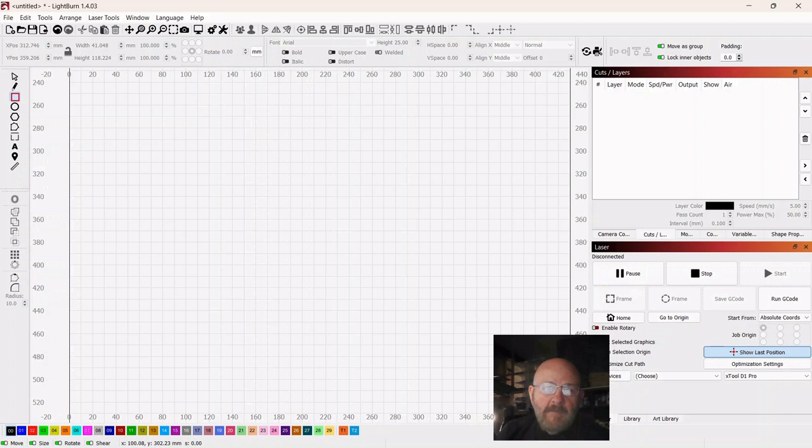So just draw out a square and click on your selector tool. We're going to try to leave this in millimeters the whole time.

Some folks asked me, or at least said it would be better if I stuck with one unit of measure throughout. They're probably right.

It'd probably help me get better with millimeters if I just stick with it. So let me know what you think in the comments.

So we're going to make this a width of, let's go with about 6 millimeters.

Now remember, you can scroll in and out with your mouse wheel, and you can push down and move the entire canvas around.

So now to make this look like a popsicle stick, let's grab a circle, hold down your shift key, and make that circle fit. Not like that, do better than that.

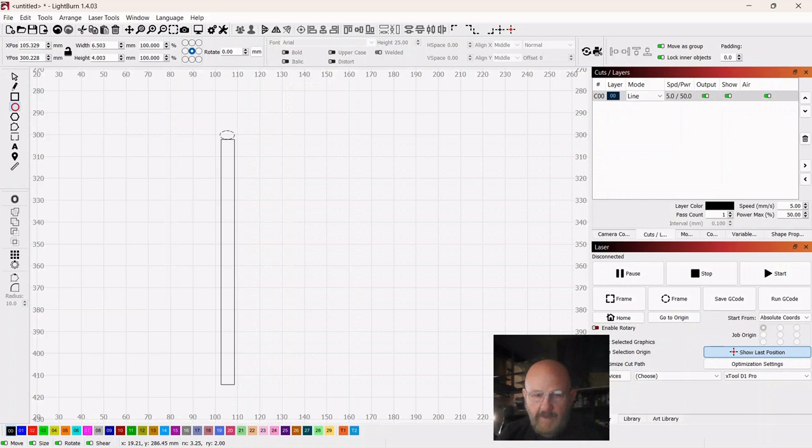Control Z will take you back. You've got to hold the shift key down to make it symmetrical, and then click your selector tool.

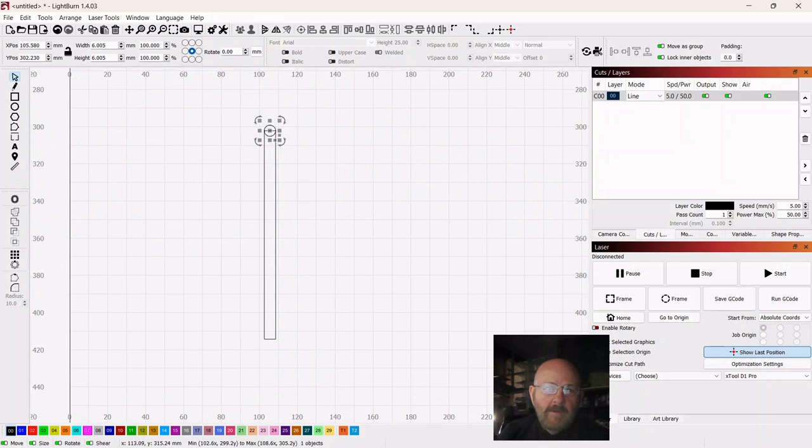Scroll in and then try to set it where it looks right, and then duplicate it, put one on the other end, and then you can weld those one at a time.

While that's selected, shift, select your stick, and then go over to the left and click weld.

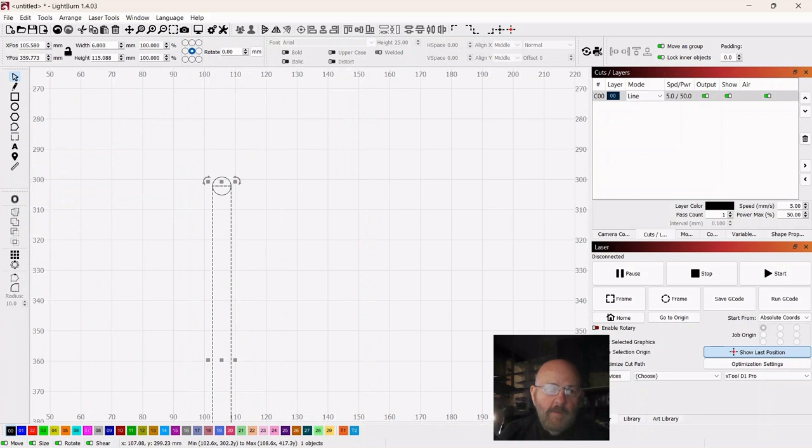That takes care of one end. While that's still selected, go back up, shift, select your other circle, and then click weld. Okay, now we have a popsicle stick.

We're going to need 5 of those. So select it, go over to the left and click Array. We're going to leave the spacing at 6 millimeters.

Then up here you can change your number of columns, and we want 5 of these. So there we have 5.

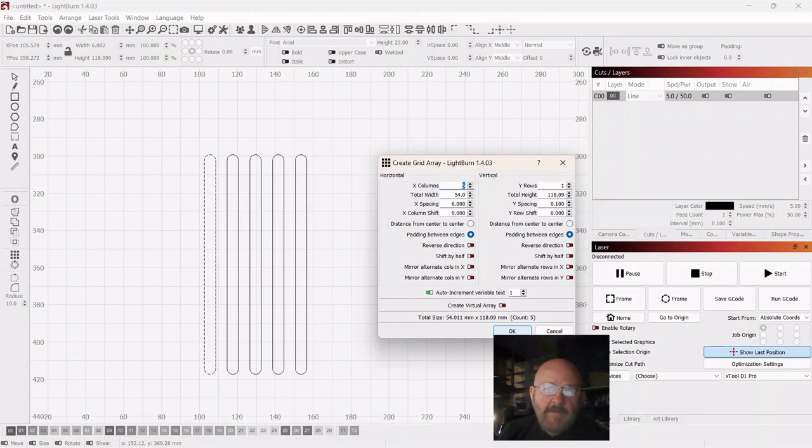Click OK. And then we're going to resize these to look more sled-like.

We'll make this center one a height of 101 millimeters.

We'll make both of these side ones 94. Oh, I didn't do something right. 94.

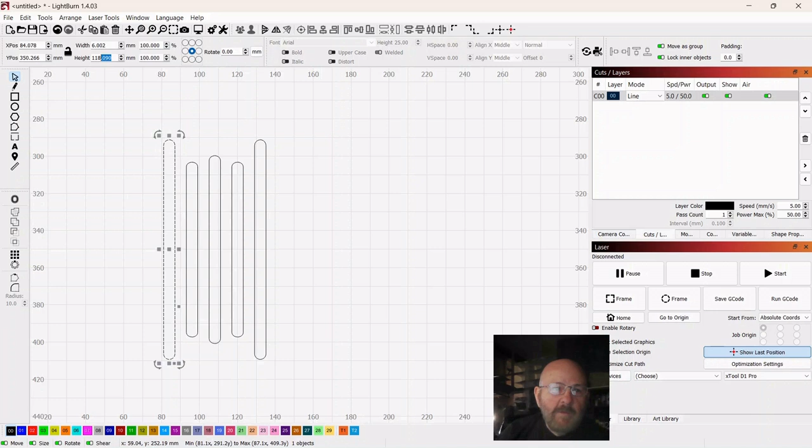So this one will also be 94. These outside ones will be 88.

Okay, so now we need to tie these together. So you can grab a square and just come across.

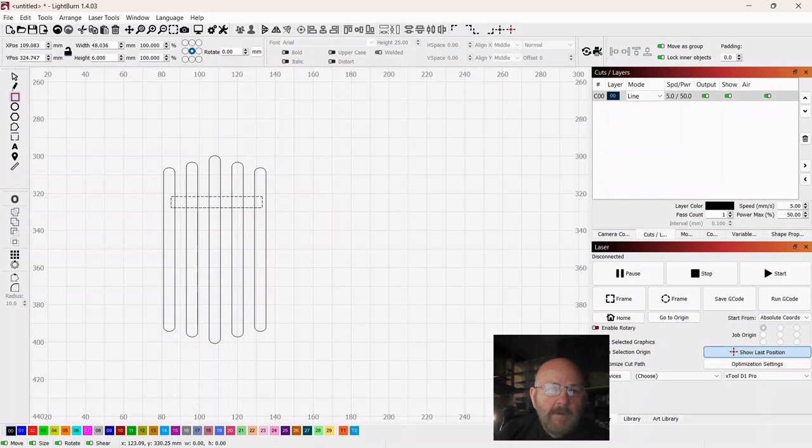Might as well make that 6 millimeters as well. As far as the length, just make sure it touches on both sides.

Then click your selector tool, duplicate it, pull it down, and then you want to...

Grab all of these popsicle sticks and group them together. Don't group the other pieces yet.

Group them in. Then grab these two, select one, shift select the other, and group those together. Then you can shift and select the rest of your piece.

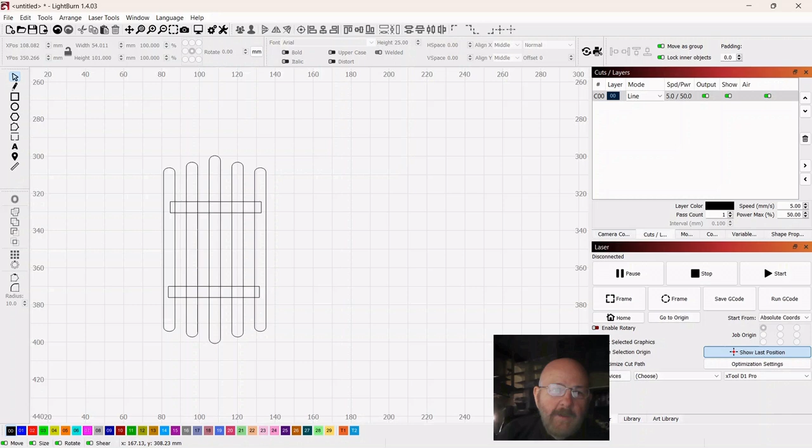And then you can hit bullseye, and then there you go. So now you want to select the whole.

We could have done this before, but then select the other with a shift, and then you want to hit union because it crosses these open spaces. Union will get you something that looks like that.

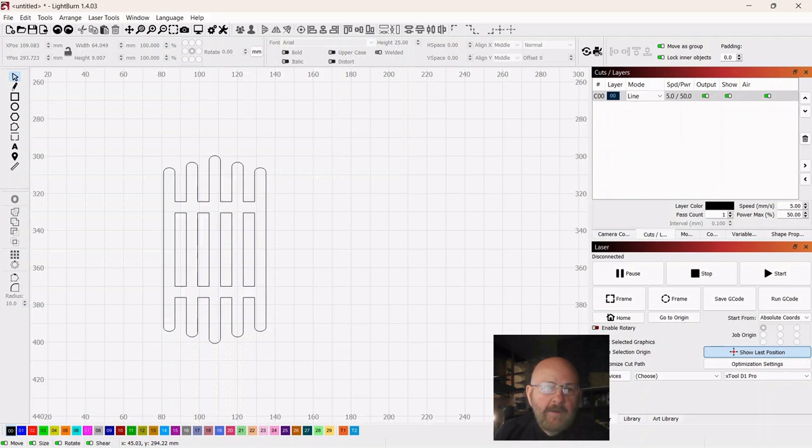Okay, so now we have our base for the sled. Go over and grab a circle, and don't hold shift.

Just kind of drag it out like this, and make sure it's at least the width of the base.

Then click your selector tool, then right click, convert to path.

Go over to the left and click edit nodes. We're not doing anything fancy. All of these are nodes, and you can shift this around and make some pretty crazy shapes. We're just going to grab this bottom one, pull this up a little bit, look something like that.

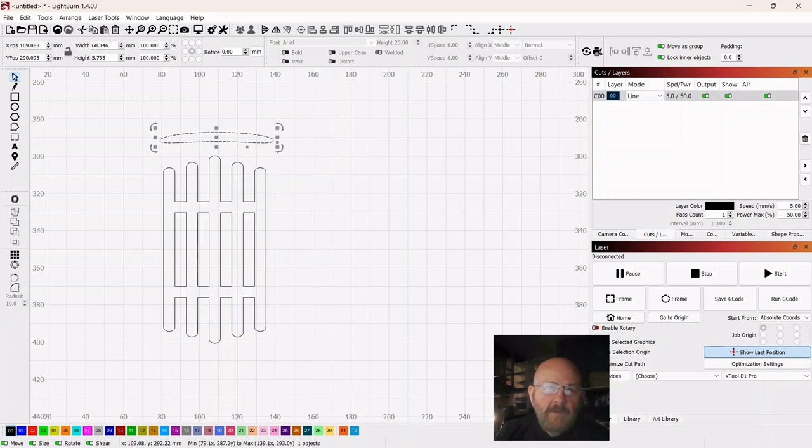And then click the selector. Okay, from here, you just want it to kind of touch that front one, and then we're going to center it. So leave it selected, shift select the base, and then click vertical align.

Now we'll add in some smaller pieces. So grab a square and go right here and just make a small piece like so. Make sure it touches this, the base and the front.

And then click your selector. Then you want to duplicate this and put it on the other side.

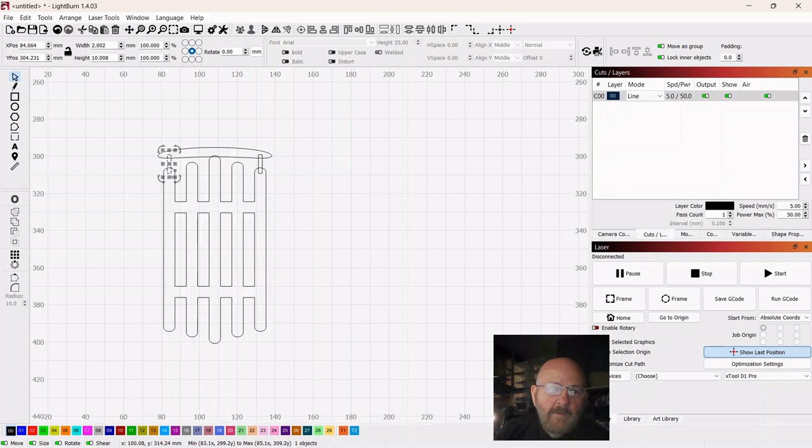We're not going to weld it to the base yet because we need to duplicate it for the bottom. So while that is selected, shift select your front rail, then click weld. While it's still selected, shift select your other extra piece, and click weld.

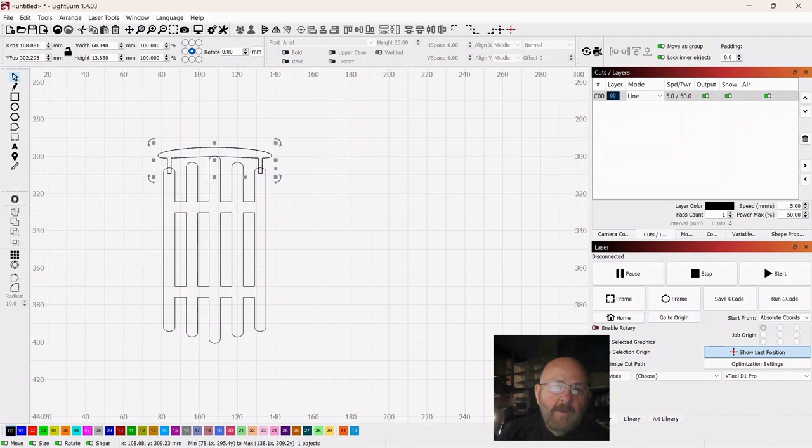Now we have what we need. So you can grab this, duplicate, drag it out, and then go up top to Arrange, and you want to do a vertical flip.

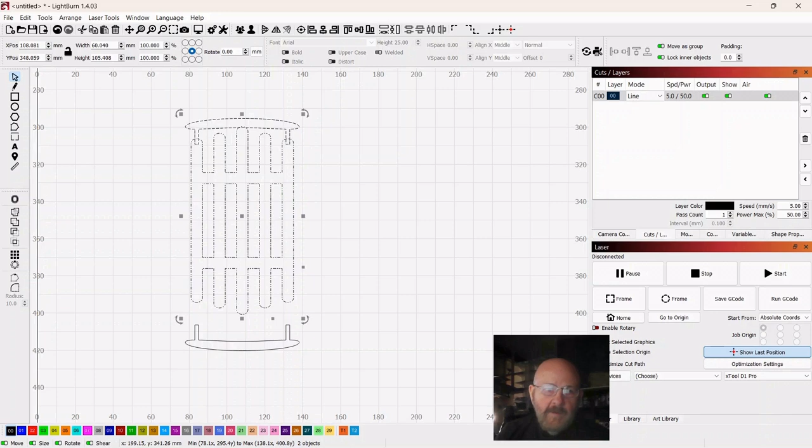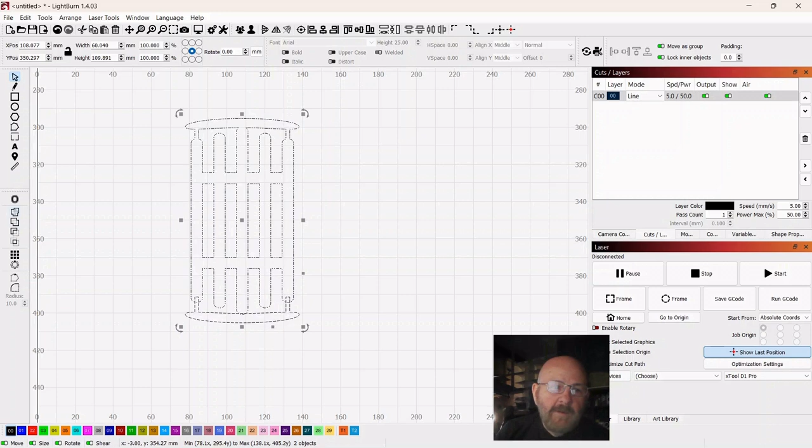Now you can go back, select that, select the base, and then click weld. Then we can attach this one down here, make sure it touches in a similar fashion. You can select and center. Well, you want to do vertical, don't do center. Do vertical, and then it'll move it over. So then select each of them one at a time using shift, and then click weld.

Okay, now we want to make our slots where we're going to place everything, and then we want to make a side rib.

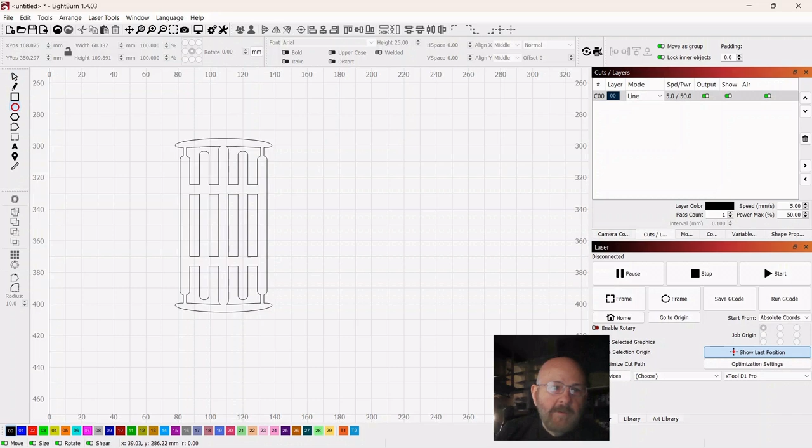So you can just grab another circle and just drag it out something like this. Hit your selector tool and make sure it is at least as long as your sled. So right click again, convert to path, go over to the left. We could have just saved one of the top pieces, but I figure if we do this a couple of times, it will help us in learning.

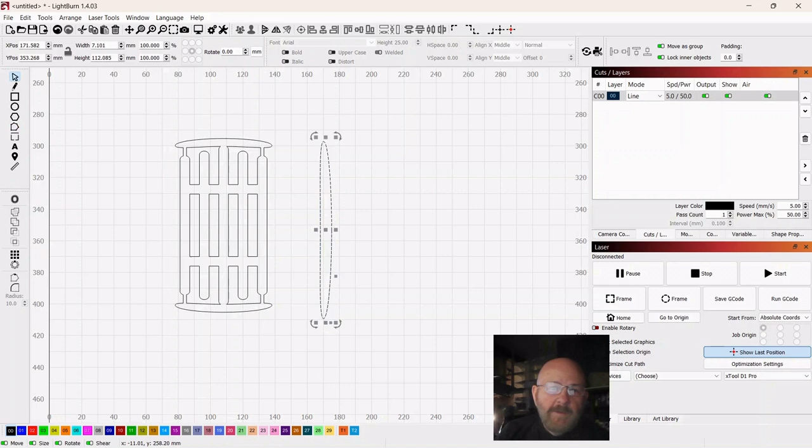Okay, so now you have that piece, and we kind of want to make it a little wavy on the end, so let's grab another circle, and I'm not measuring this, just drag it out, make it look kind of oblong like that.

Click your selector tool, duplicate, and then drag it out and make it look kind of like that. So you have two oblong shapes. And you can resize these as we go to make sure that they're exactly what we need.

So select your first one because you always have to select the one you're subtracting from first. Then shift, select the second one you made, go over to the left and click subtract. Now you have something that looks like that.

And we're going to place that on the end. We're going to add it to it. But we need to get rid of this sharp point because it just won't cut right.

So grab a square, just drag it out, doesn't matter what size. Drag it up, and then select that piece, shift, select the other piece, and click subtract.

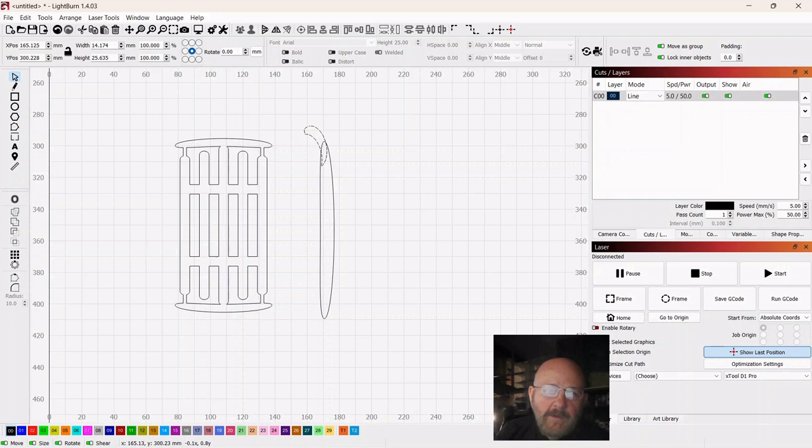So at least it's not quite as pointy now. And then we can bring it over here and shape this and make it fit where we want it. You can work with these two and get it to fit in there where it doesn't look strange.

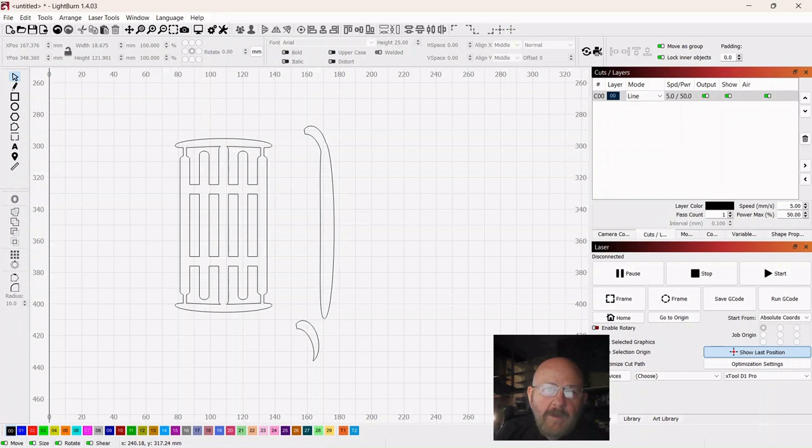Get you a duplicate of it and hold it down here for this one. Select the main one. Select the homemade piece we have and then click weld. And now you have something that looks like that. Not the prettiest sled rail, but it'll work.

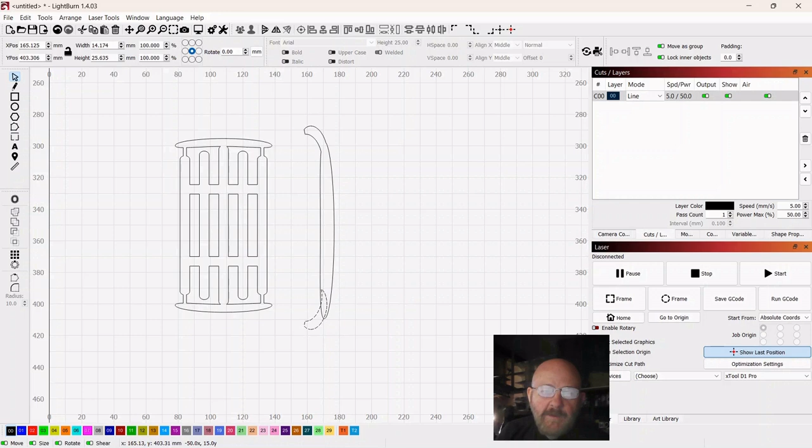So this other one, you need to select, go up to arrange, and do a vertical flip. So we're good. Thought I messed it up for a minute there. You mess up so much doing this, you expect to. Okay, and we'll leave that one there.

And then you can select the rail, shift, select our small piece, and then click weld.

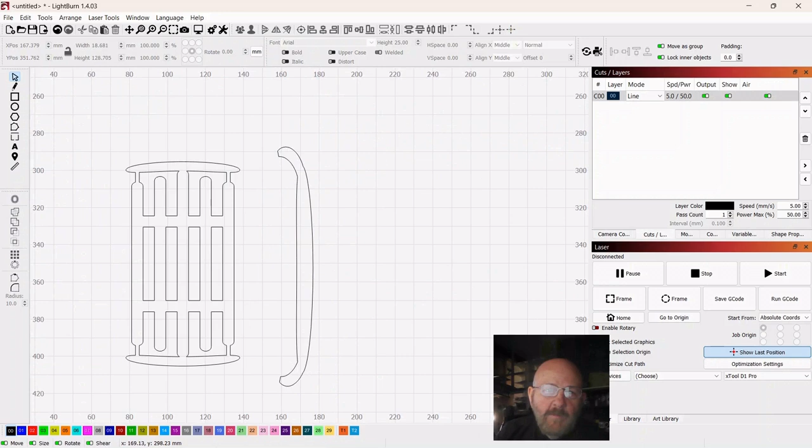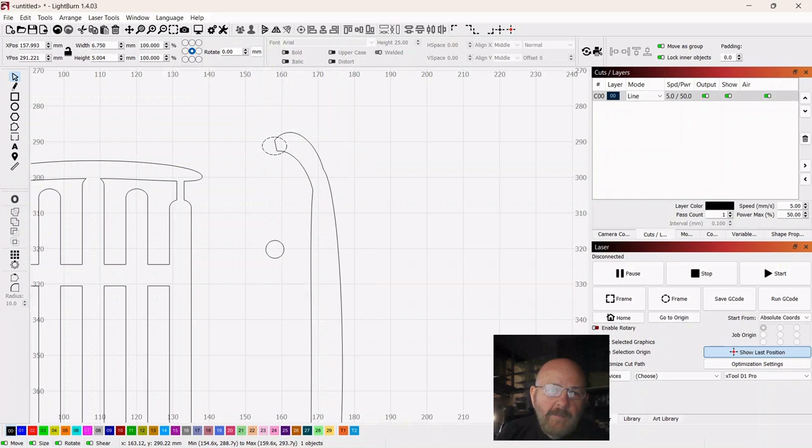And if you didn't want this to look too flat and ugly on the end, you could grab a circle, just draw out a little circle, stick that on the end of it, like so. Let's get a duplicate of it to use on the bottom. But you could work this around and make it not look so choppy on the end, like so.

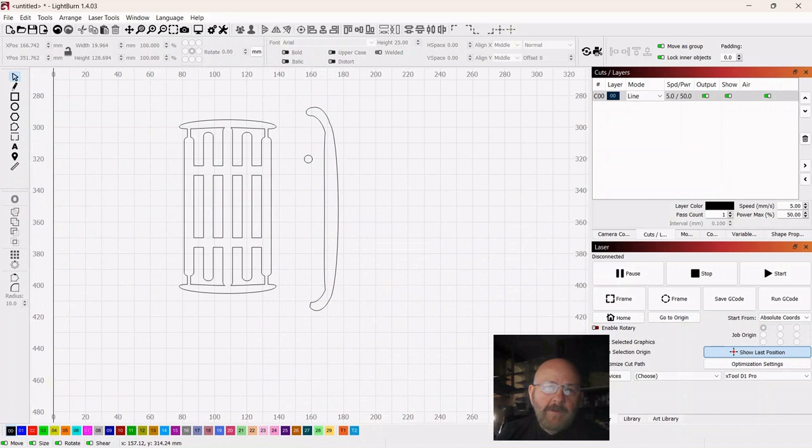Select the rail, select our little egg shape, and then click weld. And that looks a little bit better than being so choppy. And then do the other side.

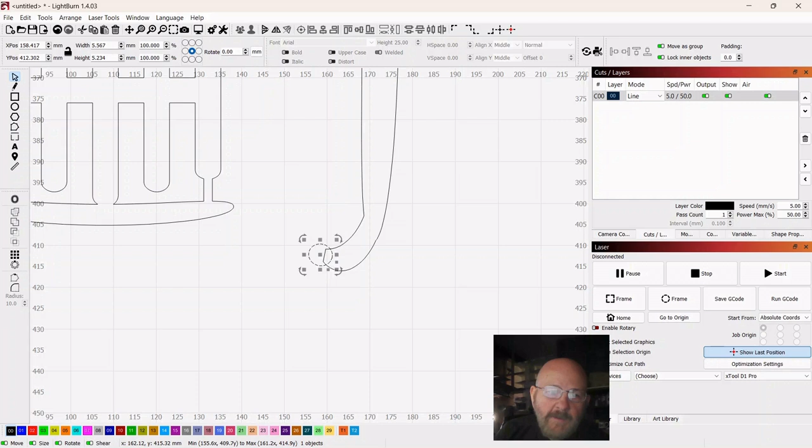Like I said, if you know how to make a sled, let me know. Because I don't, I am just playing around and trying to learn how to use Lightburn and my laser at the same time, which I suspect is what all of you are doing.

Okay, select the rail, select that piece, and click weld. There we go.

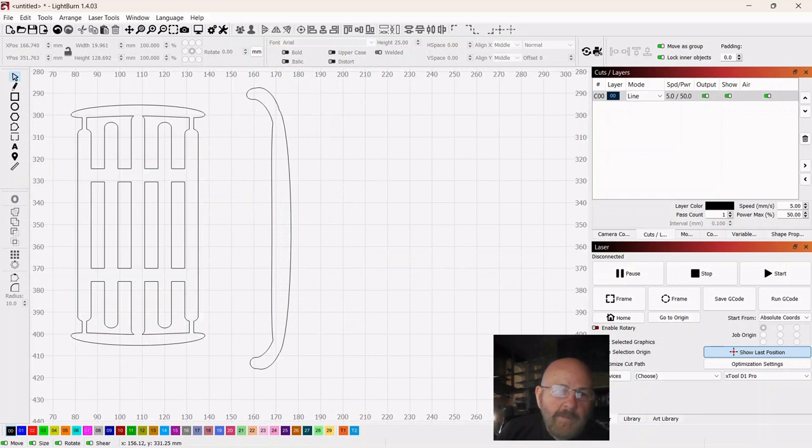We're going to put some slots here. We're going to put some tabs here, and then we will duplicate this and put one on the other side. Okay, so that's good right there.

So for slots, grab a rectangle and just drag out a slot. Be sure you're on the actual slots and not in between when you make your... I say this because I've done it. So we want to click the selector tool.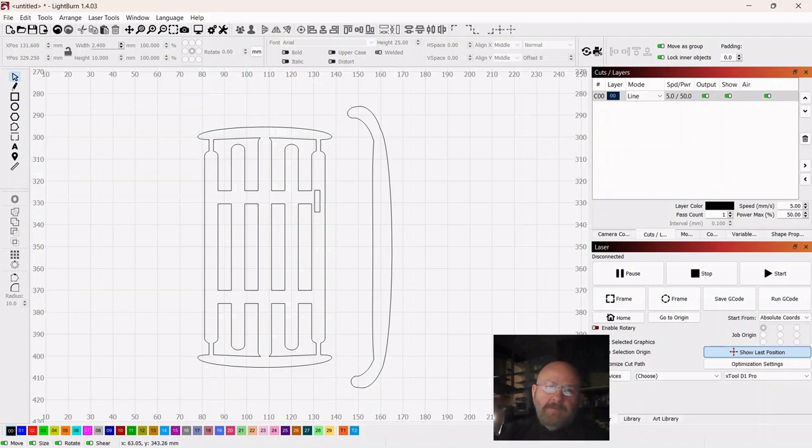We're going to give these a height of 10 millimeter and a width of 2.4. We're using 3 millimeter wood, some 3 millimeter basswood, and the 2.4 will make a slight adjustment for kerf.

All right, so just try to center this kind of on here, and we'll center it up a little more. Duplicate that, bring it down. You can duplicate and put this, well, control Z, duplicate, and drag it out here. So this will be our Christmas tree stand. Duplicate again. This will be our snowman.

And duplicate again, and this will be our little Merry Christmas sign. Now you can grab all three of these. Leave that one selected, Shift select that one, Shift select that one. And then do a horizontal alignment, and it'll put them all together.

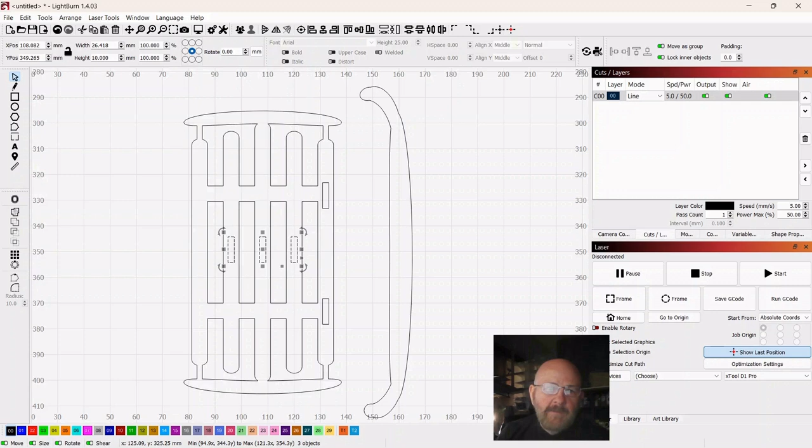Then you can Shift and select the entire piece there and do, I'm hoping, a bullseye. You cannot, because I didn't group them together. All right, so back up with a Control Z. Let's do this right.

Select, Shift select, Shift select. Group these three together. Then Shift select your sled. Then hit bullseye. Okay, now we're centered.

So now let's select this one, Shift select this one, group these together. And then Shift, and on this one you need to hit a horizontal alignment.

There you go. And always select the piece you want to move during the alignment. If you select the slot first and then the sled, the slots will move. If you select the sled first, then it'll move.

Okay, so now we're straight there. So we want to duplicate this and bring it over here. And then we will select the sled and then we'll do another horizontal alignment, and we're good.

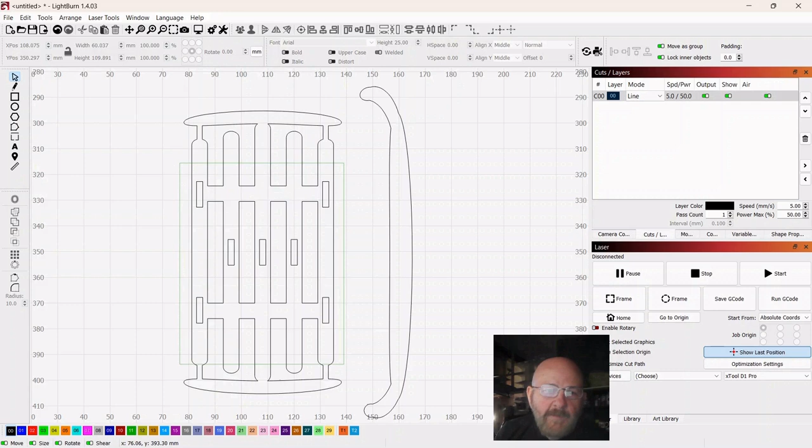Now we want to just grab everything, and notice when you come from the right, you get a green line when you're selecting, and you only have to touch the items - you have to touch every item for it to select. If you come from the left, you can't do that. It'll only select the item that is completely encased in the red section, so you have to grab everything for it to select.

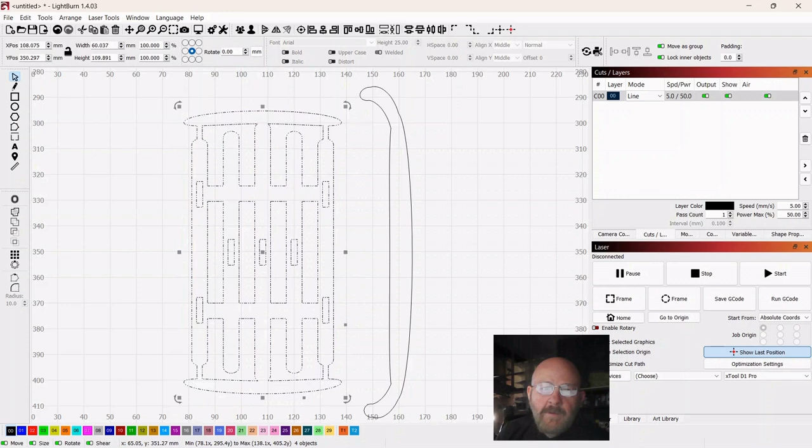So both of those have uses, and you'll figure it out as you learn. But it depends on what situation you're in and how many items you're trying to move at one time. Okay, so select them all, right click, and group.

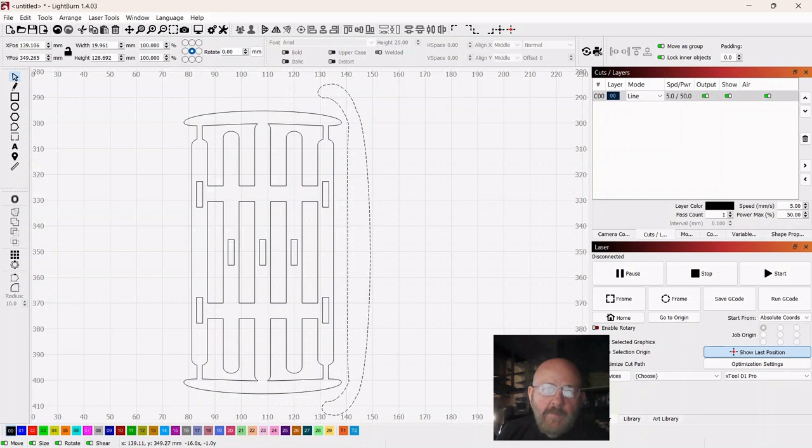Okay, now we want to make some tabs to go here, but we want this to be centered on this. So we're going to pull it up, and probably come away from it a little bit so it'll be up off the ground some. So select your skid, Shift select the rest there, and then do a horizontal alignment.

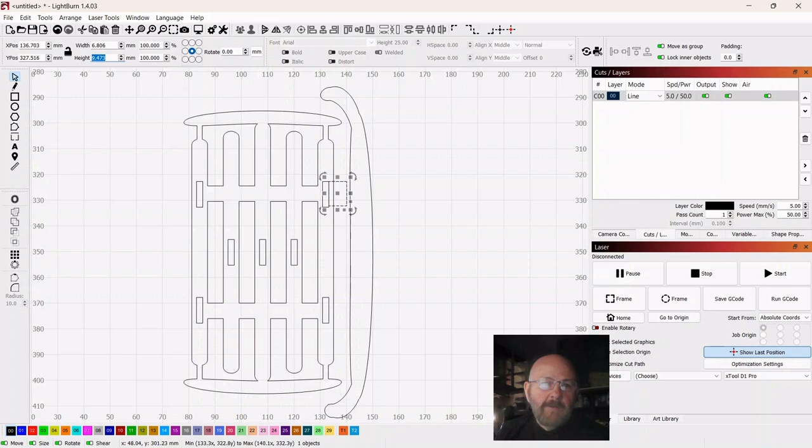Now you want to grab a square, and we're just going to make this fit in there. So we should make it a height of 10 millimeters. Let me scroll in a little bit.

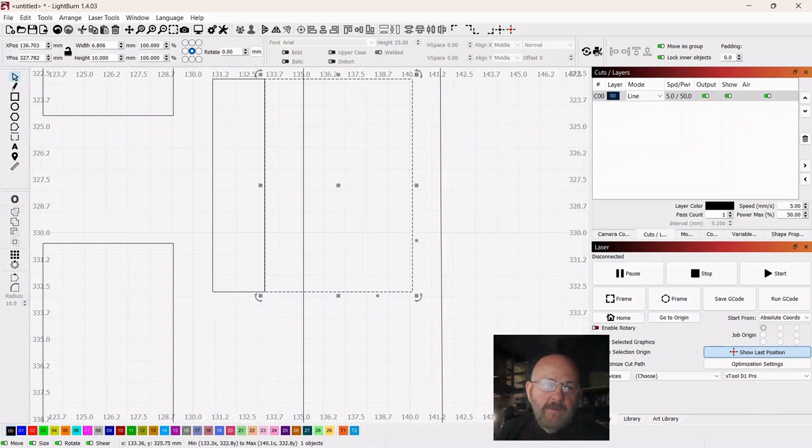And then if you get close, you can see your cursor will change. And then we can put this right up against that, so we know it's set where we want it to be. And you pull it down to there. All it has to do is touch so we can weld it.

It won't weld over here, it's just going to weld here. Then you can duplicate that, bring it down here and do the same thing. Your cursor changes, you get it lined up, it'll snap to that line.

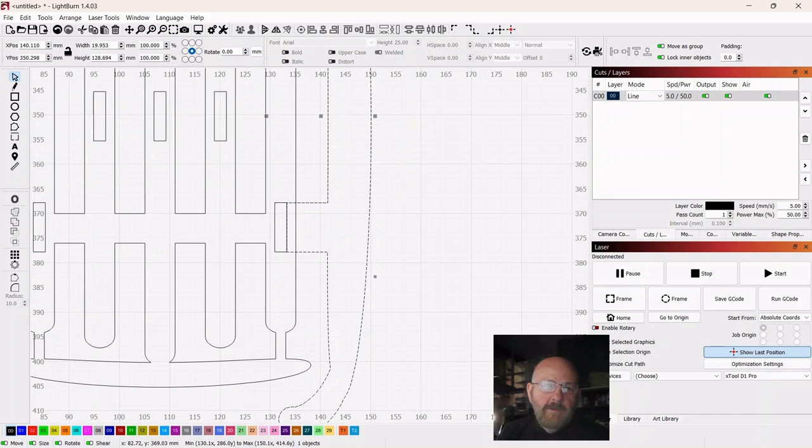Now, while that's selected, you can Shift select your skid and hit weld. While that's still selected, you can Shift select your tab and hit weld.

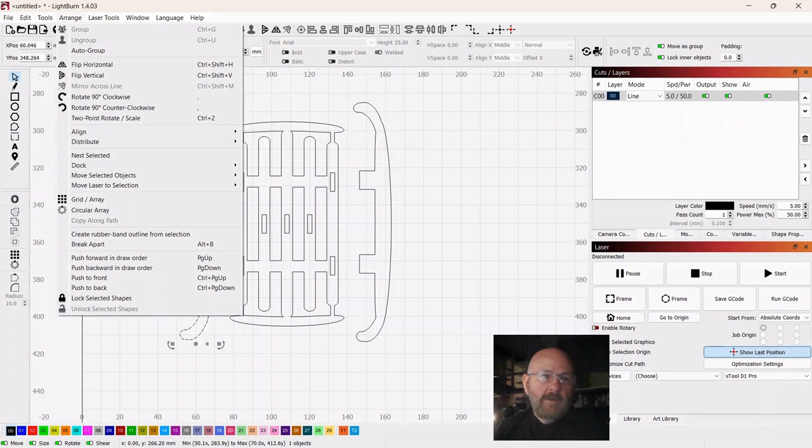Now we have this made, and then we can duplicate that, drag it over to the other side, go up to arrange, and do a horizontal flip. Okay, so that is our sled.

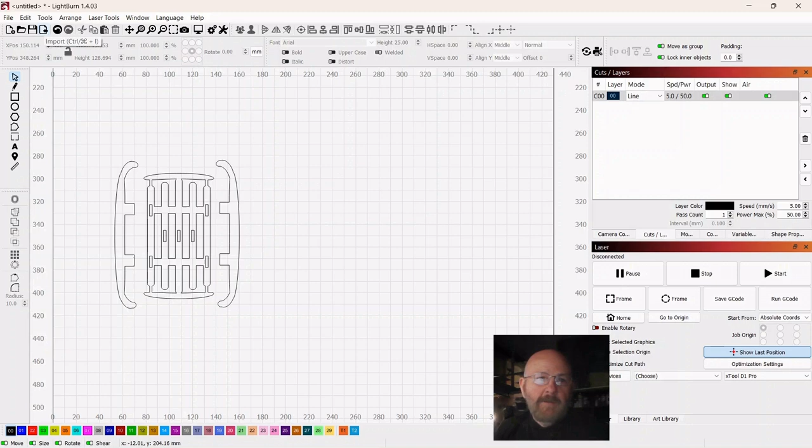So now we're going to put some stuff on it, so Christmas tree. Now these are free vectors, and I'll put links to these down in the description so you can go out and get them. You can find some others you might like.

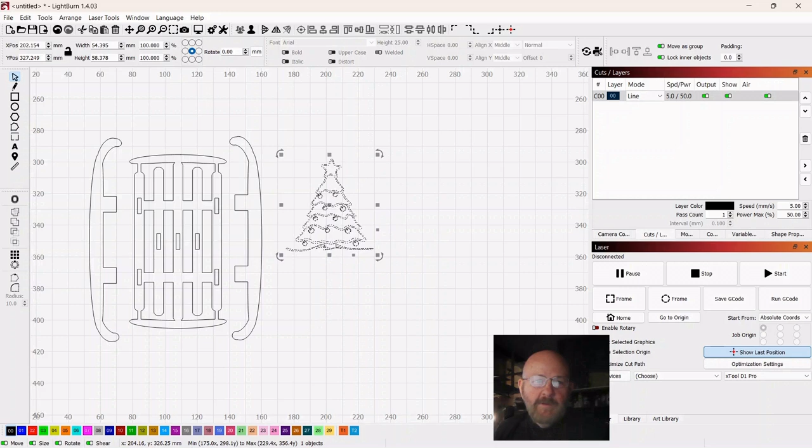Okay, so we're going to make this tree. I think we'll go about half the size of the sled - that ought to work fine. So first, we got to have a base that can attach to the sled.

So we're going to go over and do an offset of that, and we're going to make it an outward offset. You can see how it changes here. And then we're going to make it, let's make it about 2 millimeters to start with, see how that works out.

Okay, so after you make your offset, you can drag your original out. And I think we probably should have left it at 5 or something a little larger. I'm going to back up. I'm going to go back to offset.

We're going to try 3 because we want it to be kind of solid down here. If not, we'd have to draw some lines and then we could make it solid. If we can do it with this, we will. That looks pretty good. Okay, we're going to leave it at 3.

So now we can drag this out, and you can set it for a score. So whatever you have for score, set it for that. And then over on the top right, when you do have a score, be sure to grab it and drag it above the cut line.

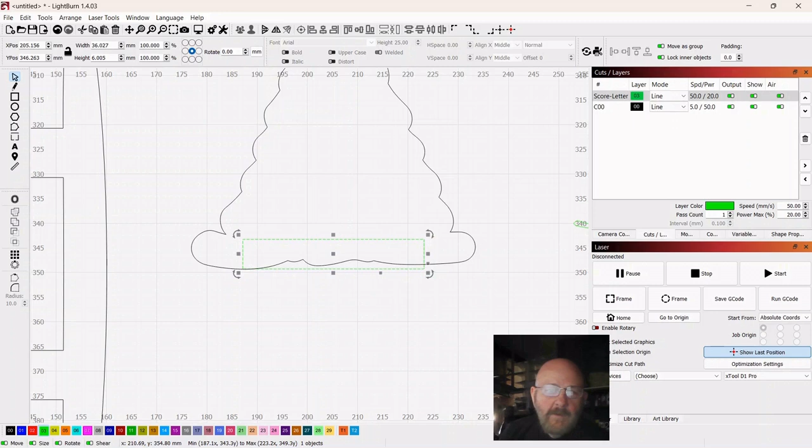So it won't be quite as lumpy right there. Okay, make that a cut, and then select your backdrop, and then hit weld and put it there. That looks a little weird right there, but it doesn't matter. It'll be all right. So then grab

Another square, draw it out, get your selector tool. We want to make it a width of 10, and a height of 3. Because we know we have 3 millimeter wood, and this will just let it go through without sticking way through it. Now get close in.

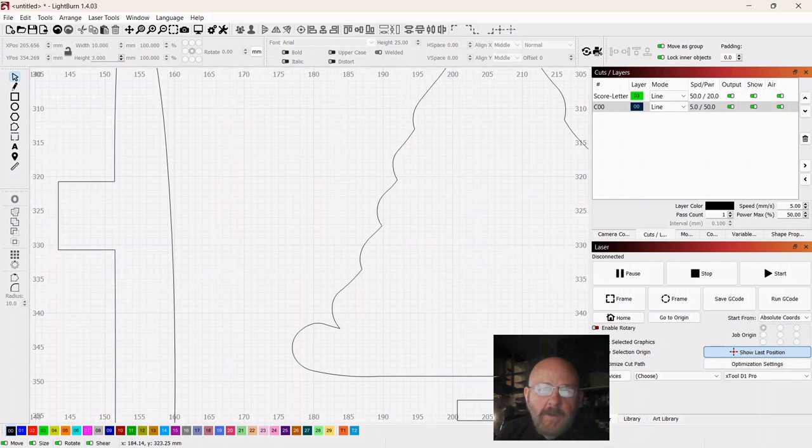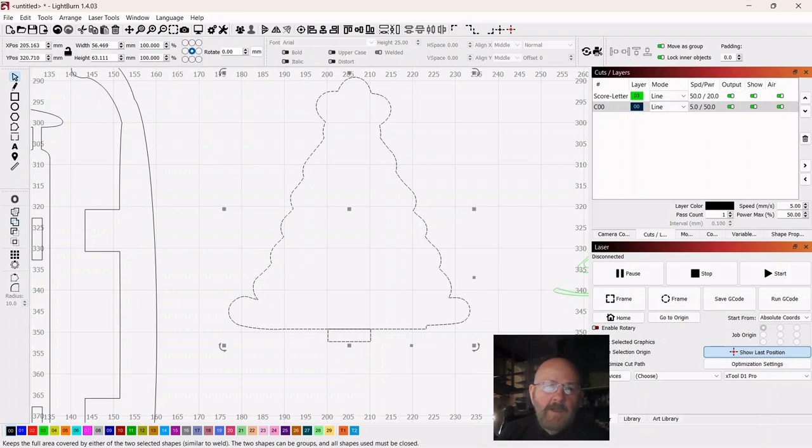Select your tab, and then again get your cursor right on that edge, and then it'll snap to that straight edge. So that's why you wanted a straight edge. Then you can shift, select your tree, and do a vertical alignment, and it'll move that, and then you can just click weld, and there we go.

We have that done. So our tree will set right on there, and it'll set on our sled and look pretty sweet. You can go ahead and group that together. Anytime you have more welding to do, if you group in your score first, and then you weld something, it'll take on the score, and you'll end up having to back it out.

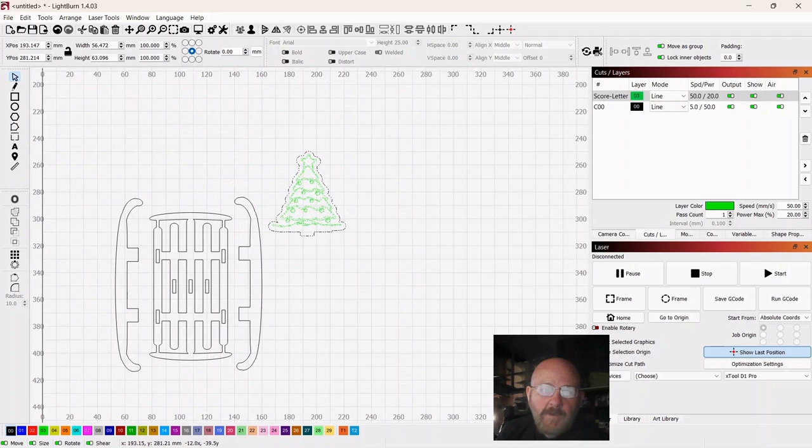So just don't group it in until you're done welding and making unions or whatever adjustments you're making.

All right, now we're going to get a snowman. Again, this is free on the internet.

Now when you have your vectors open up large, just grab it from the corner and it will resize proportionately. You don't want to have it odd shaped, which you can grab it in a lot of ways. Now we just want to resize our snowman to make it smaller than the Christmas tree.

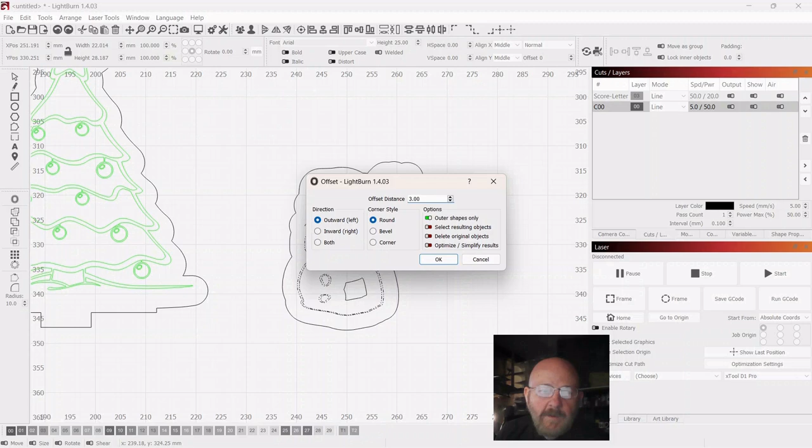That looks about right. Okay, so now we're going to do the same thing with the offset. We're going to go offset. 3 looks like way too much, so we'll try 1. See how that works. Pull out our original.

Now when you do an offset like this, you can grab your backdrop, right click, ungroup, and then you can get rid of these pieces in the middle. So you can grab the outer edge like so, move it out of the way, highlight all of your junk pieces that you don't want, delete them, get them out of the way.

Saves you a lot of time. Now we need to flatten off the bottom of this just like we did with the Christmas tree. So grab a square and just bring it across and do whatever it takes to make that square on the bottom. Something like so. Then select your snowman backdrop and click weld, and there you go.

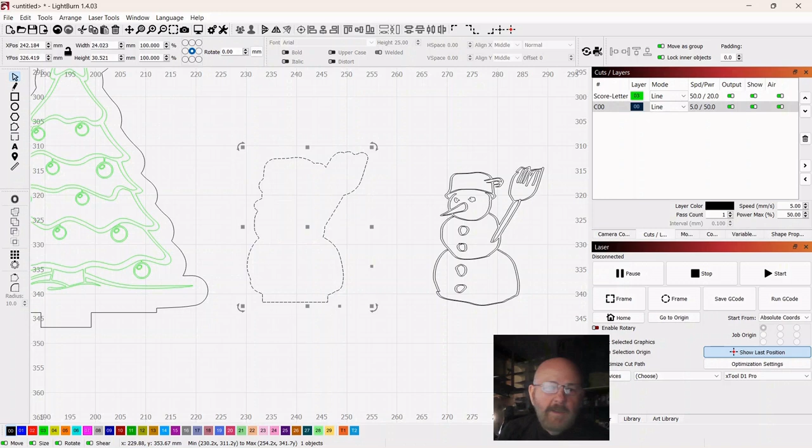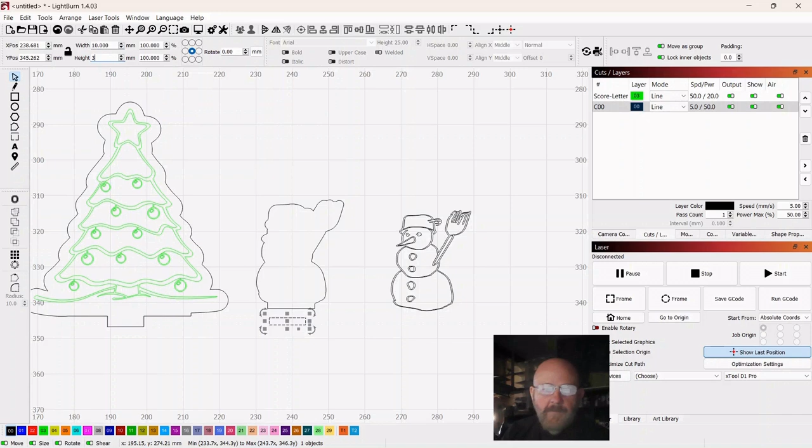So then we want to put a tab on that as well. So you drag it out, click select. We're also going to make it a width of 10 millimeters and a height of 3. And we're going to scroll in.

You can select just like before, get close in on it, snap it to your straight edge, shift, select the snowman, and do the alignment. The reason that it did that is because it took into consideration the entire snowman, not just the part we added. So sometimes you can draw out your square that you're going to make the straight edge with, do your tab and add it to the straight edge before you attach it.

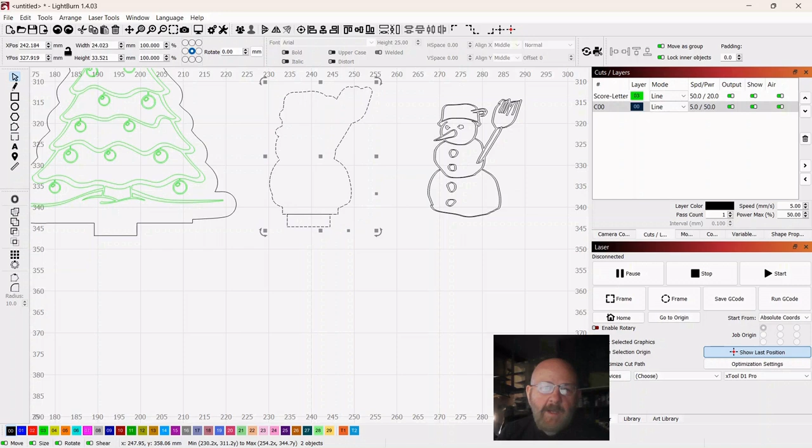So you just have to make some judgment calls on that. You can Control Z and get back, and then we can just leave that there, or you can try to straighten it up a little more, but I think it'll be all right. So select, shift, select your backdrop, and then click weld.

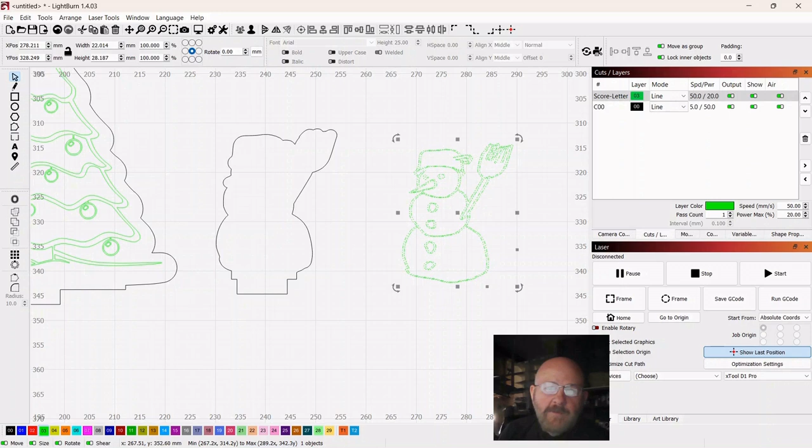Now you can go over, make your snowman a score, set him on the backdrop, and then you can group together.

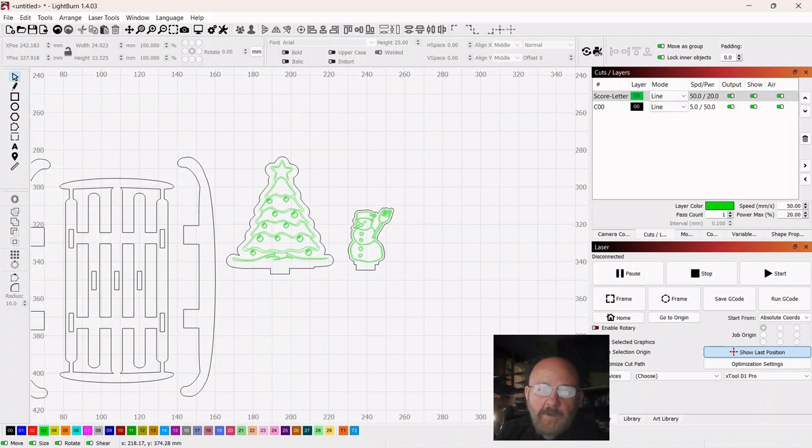Now once you put your tabs on or you add your slots, you can't resize anymore without messing those up. So everything, you would have to grab everything together to resize, and even that is tricky.

So now we want to do a Merry Christmas, and we'll make it a little smaller than the snowman. So let's go over and grab the text tool, go up and grab Academy Engraved - it does a good job. It shows up as engraved even when you use a score.

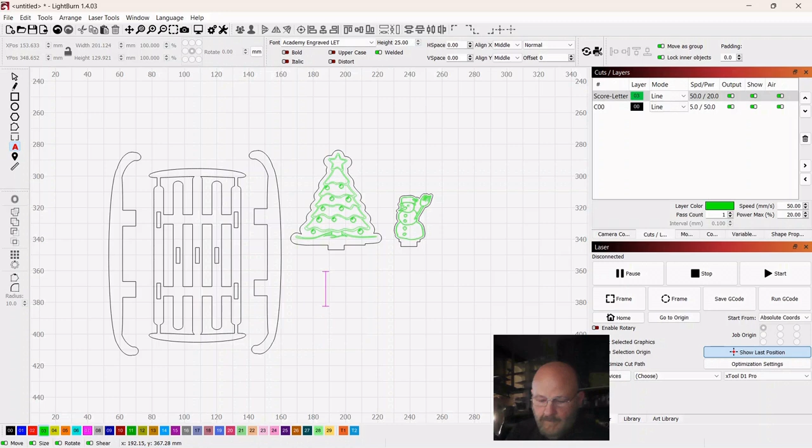And we'll just type this out and then we'll resize it accordingly. So all caps, Merry, Enter, and Christmas. I know, almost misspelled it. I didn't say I was a good speller. So, all right.

So we can bring this down like so. And then we're going to do a backdrop on it. So go over to your offset, and I'm going to make it larger so it'll touch.

Watch how this moves accordingly so it'll come together, and you can judge that way. Okay, click OK. You can pull your Merry Christmas out.

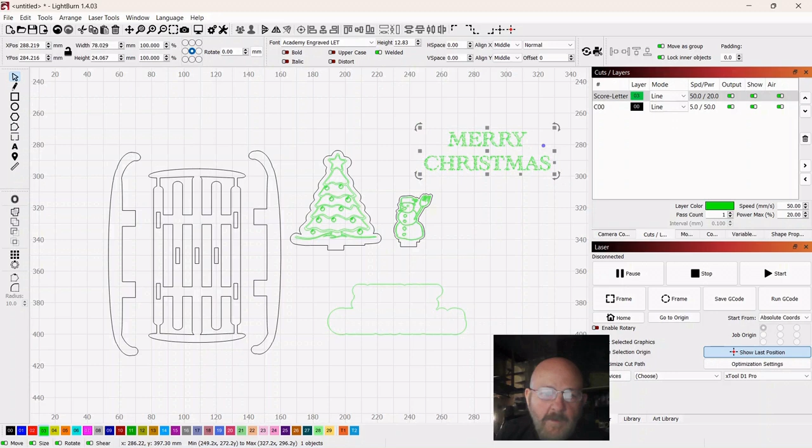This may be good enough to put a tab on. So you want to select your backdrop, make it a cut. And we're going to have to straighten that bottom edge out. So just grab a square, straighten it out like so.

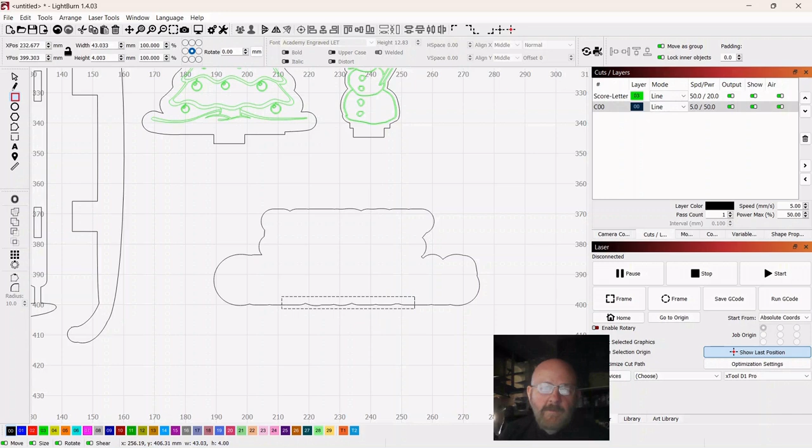Select your backdrop. Oh, Control Z, I didn't hit the selector tool. Shift, select your backdrop, and then click weld, and you have a straight edge. Now, I know I could have saved these tabs and just used the same one over and over. That's all right - the more we do this, the better we will be at it.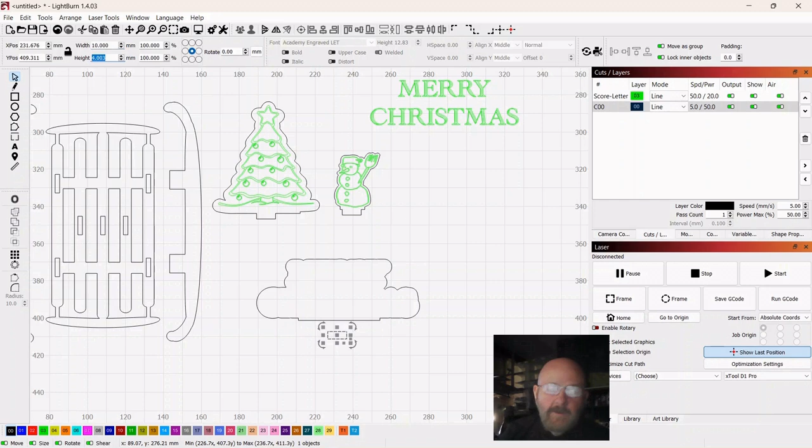So we'll make it a width of 10 and a height of 3. Scroll in, grab the edge, and pop it up to the center. And maybe this will center.

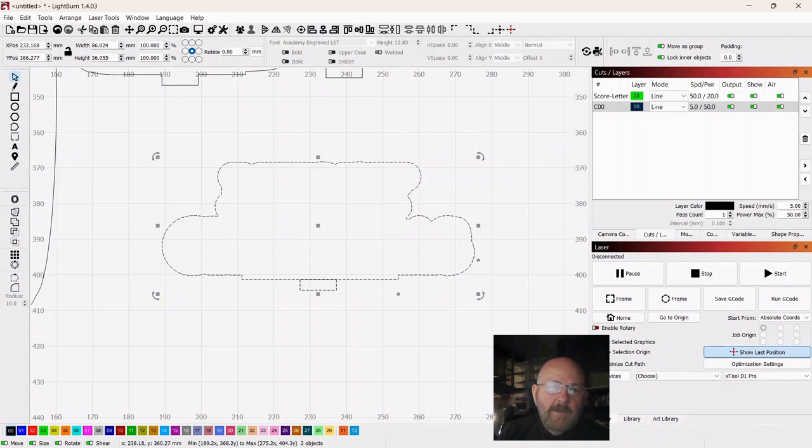Shift, select, and do a vertical alignment. That looks pretty good. Now you can go over and click weld. Now, grab your Merry Christmas, you can pop it in there. Select it all and group.

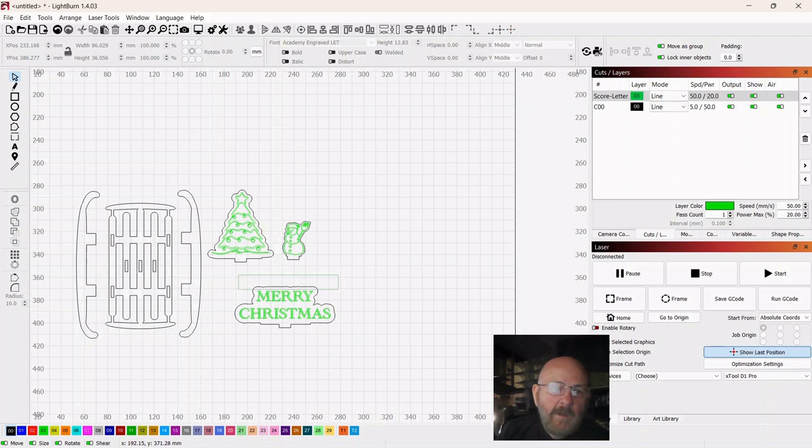Okay, folks, I believe we just made a sled, and we will see how this looks. So let me - we're gonna, like I said, cut this out on 3mm basswood plywood, and let me get set up in the laser. We'll cut it out and see how it looks. Okay, I'll be right back.

Okay, folks, I believe we're ready to cut this out. And again, we're using 3mm basswood plywood.

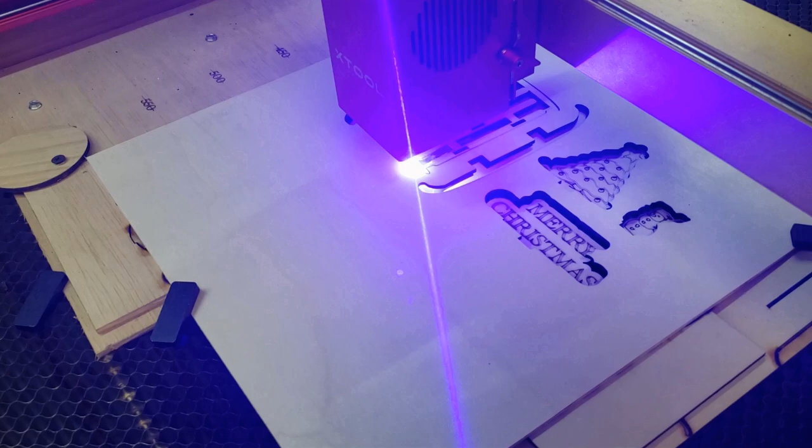Okay, so I made the Merry Christmas sign way bigger than it should have been. So I'm going to jump back into LightBurn, correct that, come back and recut it.

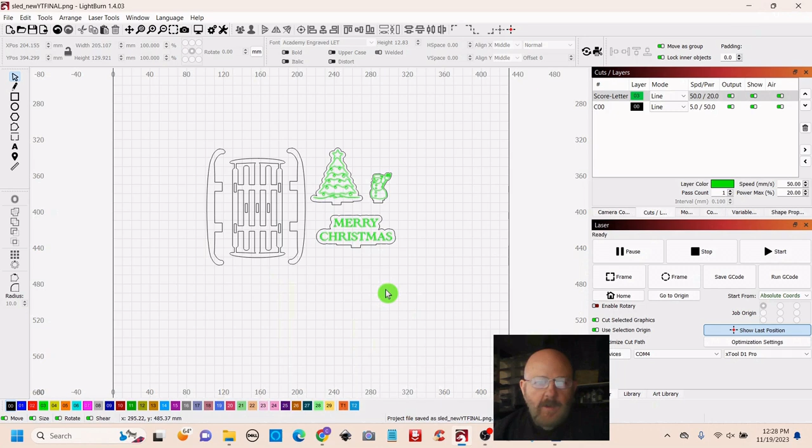Okay, so I made the Merry Christmas larger than it should have been. So here's what we're going to do - we're just going to resize it, and then we'll fix that bottom with a new tab. We don't need it to be larger than the snowman, because we'll have the Christmas tree, the snowman, and then the Merry Christmas.

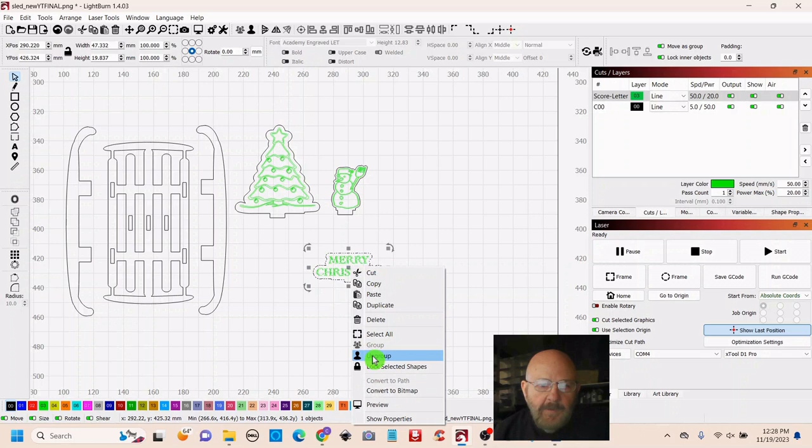Okay, so now that it's resized, we have to ungroup. We have to pull out the writing, otherwise it'll take on the score.

So let's grab a new tab and see if it'll just cover this one up. Going to make it a width of 10 and a height of 3.

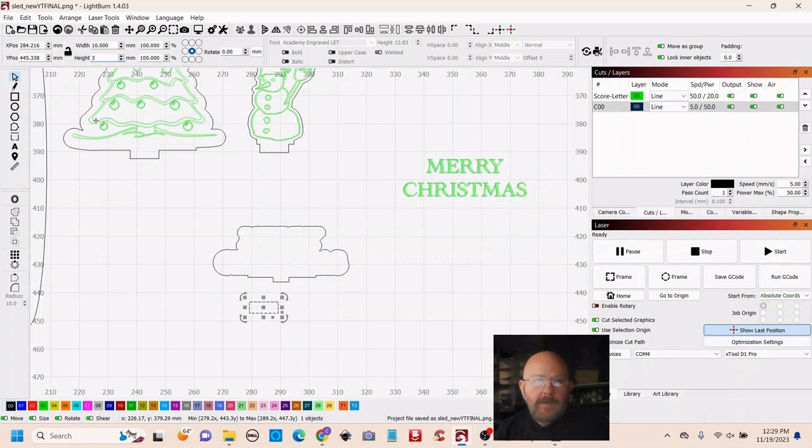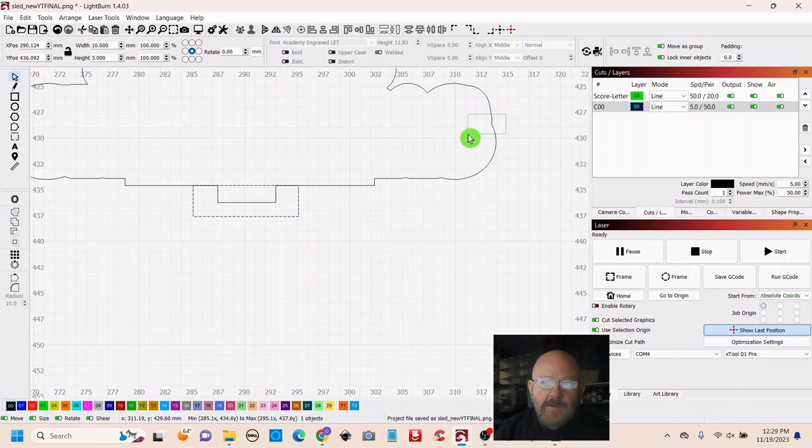And we're just going to grab it and try to pull it up like so. And then shift, select your backdrop, do a vertical align, and then go over and hit weld. Okay, that should do it.

We can bring our Merry Christmas back, and let me straighten it up a little bit more. Then we can group it back together

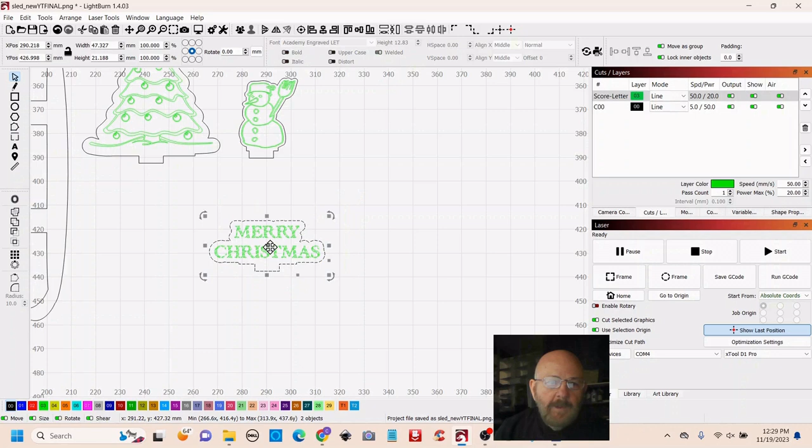and recut that. And with LightBurn, only the item selected will go to the laser. You can check that by doing a preview up here, and it'll show you what's going to the laser.

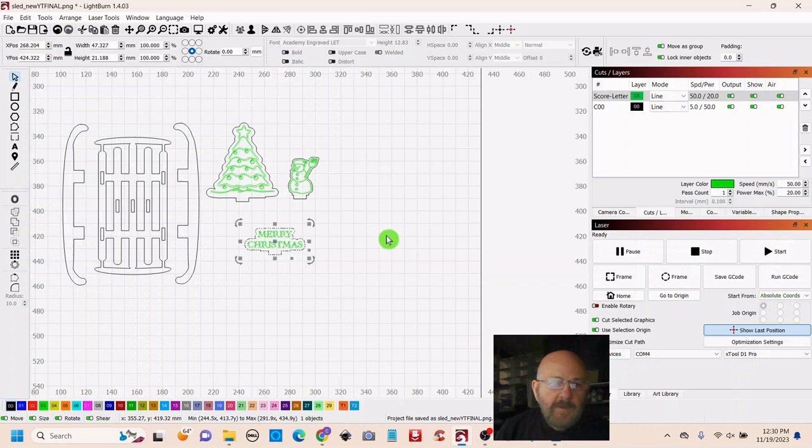Okay, so let me get back to the laser, and we will cut Merry Christmas out again and see what this looks like. Okay, folks, I'll be right back.

Okay, now let me get this together and we'll see what it looks like. I'll be back shortly. Okay, well here's our final product. Turned out pretty good. Let me see if I can get it closer.